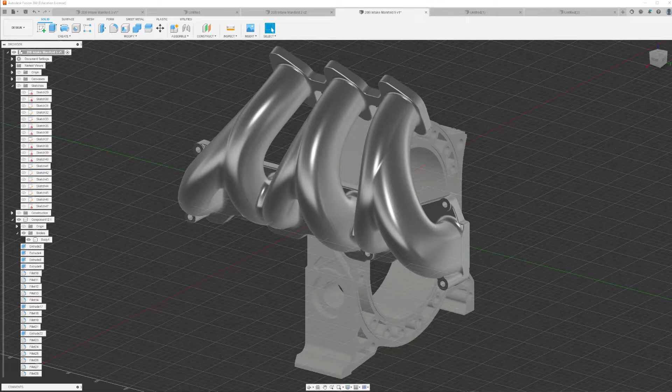Okay, I just wanted to make a video about Fusion 360 and specifically lofting. I learnt a few things in making this model that I didn't know before, and maybe it will help some of you. So we're going to create a new sketch, just make some random shapes.

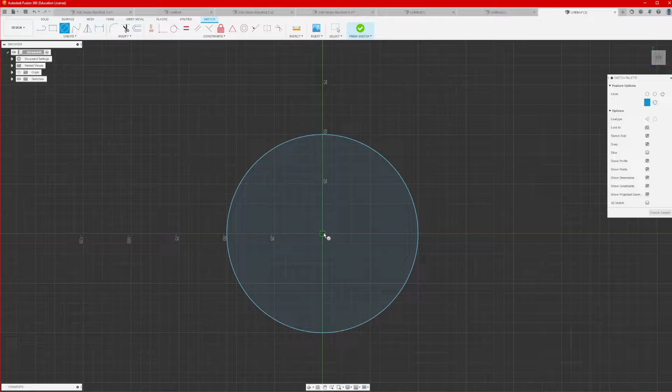I'm going to make a new sketch on this plane, and I'm going to make a center diameter circle, 100mm diameter, 80mm inside diameter.

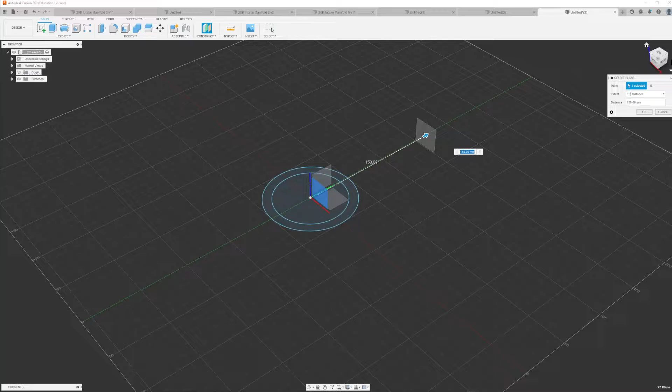Then we're going to finish the sketch and I'm going to make an offset plane. So I'm going to select here, just drag it out however far you want to go. I've dragged it out 150mm from the center.

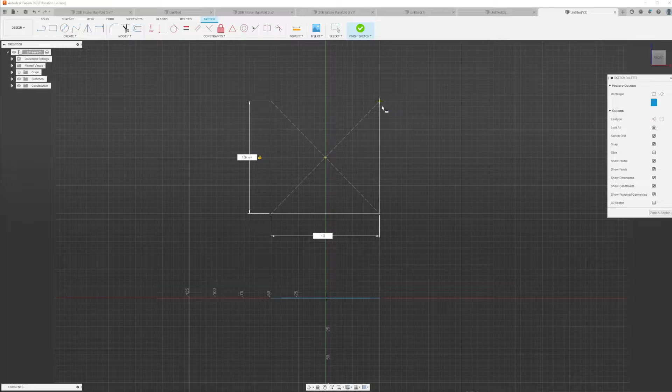I'm going to create a new sketch on that plane, and then we can come up with a 2-point rectangle, a center rectangle. We could do 100 by 100, and then offset that by, let's say, 20mm. Doesn't have to be the same as the first one. So finish the sketch.

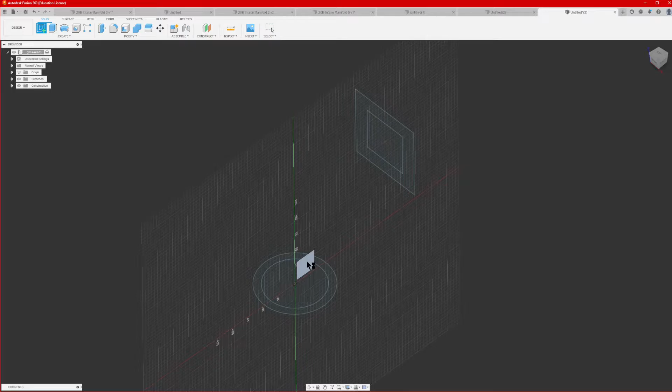One more sketch. I'm going to make a fit point spline from the center points of each of these rectangles and the circle. You'll notice that the spline is just straight right now.

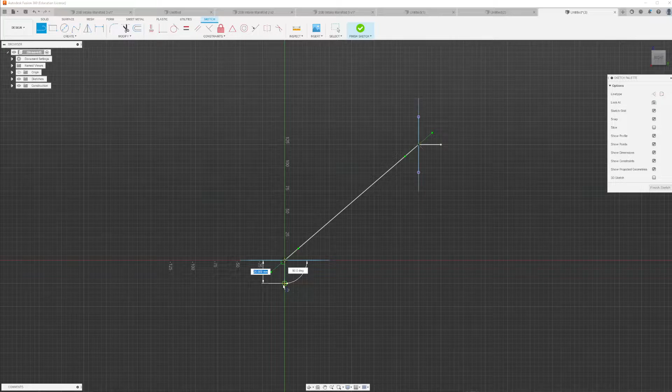So we're going to just make a line to go out. Going to repeat the line to do the same thing down here. Now we can use the tangent tool.

We can select the line so you can see what we're doing, and we're going to make a tangent to this one. We'll do that again, just to this one, so it's a smooth transition between these two places.

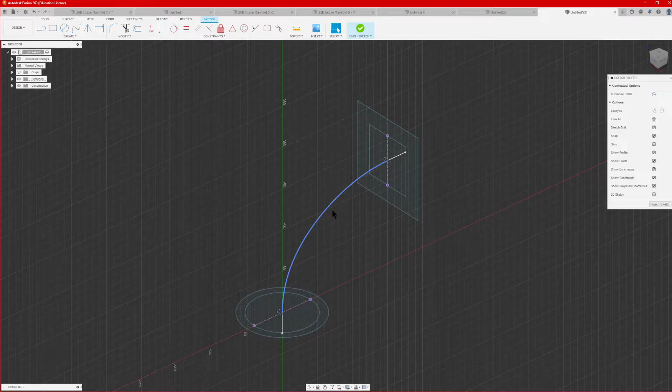Now I'm going to select OK and left click on this spline, then right click and select Insert Spline Fit Point, so you can insert it pretty much anywhere that you want. You might want to make a weird shape to get around some obstruction or something like that.

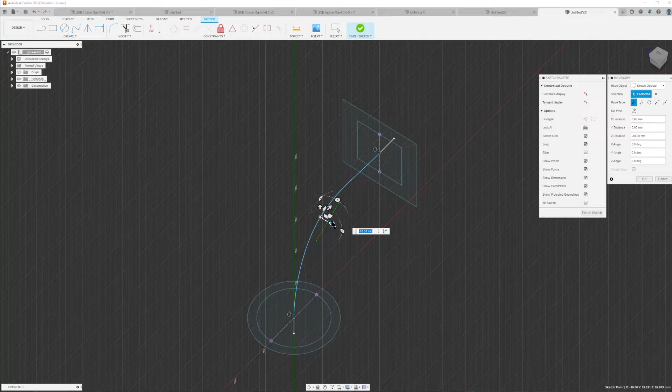So now that we have this, I'm going to right click and select OK, so I can select that spline fit point, and then when it's selected I can hit M on my keyboard to bring up the move command and just move it. I won't go too far, otherwise the transition will buckle a little bit and it might give an error. So I'm just going to move it 10mm.

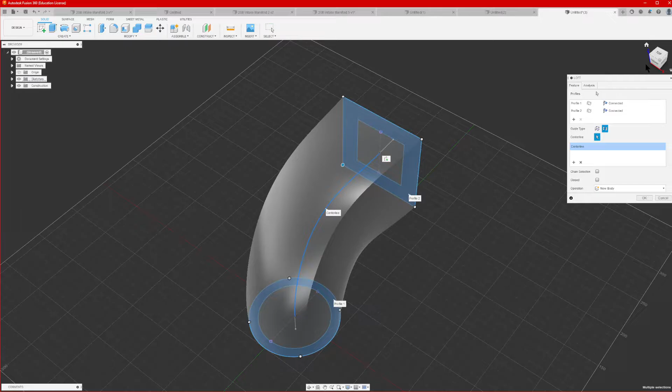Okay, so now we can finish this sketch. We can create a loft between these two profiles, and for the guide type we're going to want to hit center line, so we can trace along this path. You can see that it transitions from the circle to the square.

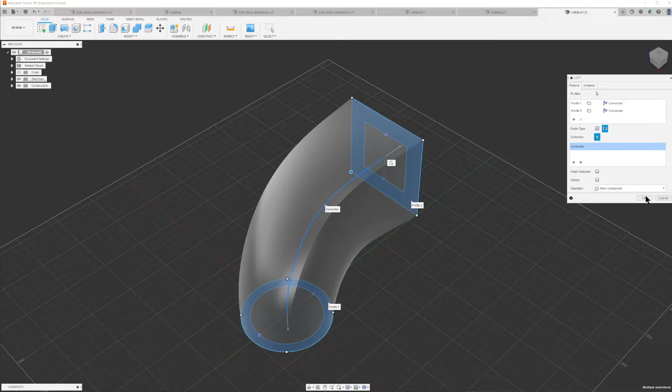You'll also notice that it's a solid, it's not actually carving out the center or anything like that. So the way I found, we'll make this a new component. Even if you hit closed, I'm not really sure what the purpose of selecting closed is, but it doesn't seem to do anything. So we're just gonna leave it at that, and then we have this shape.

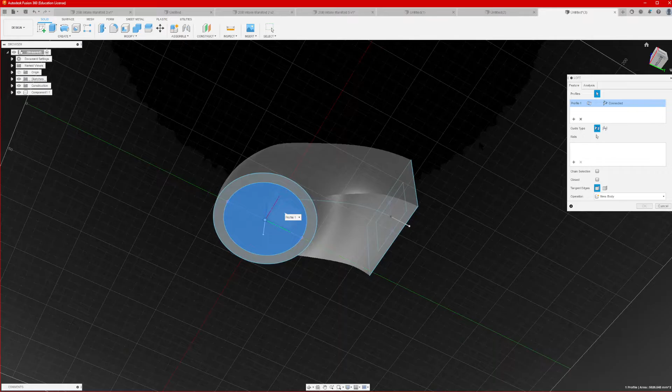But I really want this to be like a manifold, right? I want to have a hollow section with an even wall thickness. So we're gonna do that again and select loft between this profile. Make sure you select the inside profiles, so it's actually going to cut.

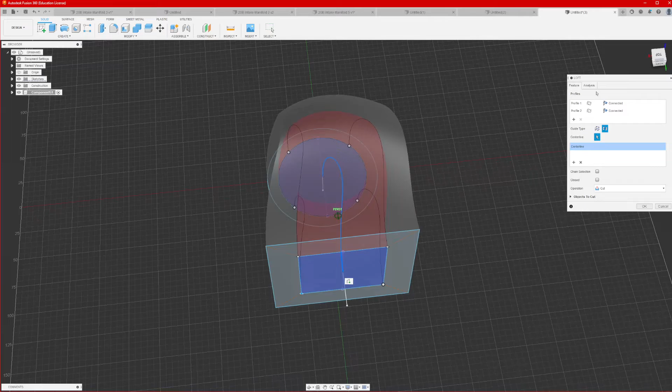Now again, we have to select this spline, so I'm going to hide the model so we can see the spline and select the center line guide type again. Now we can make this object visible and it changes back over to a cut. You can see here that the wall thickness is very uniform, and that looks good, so we're going to click OK.

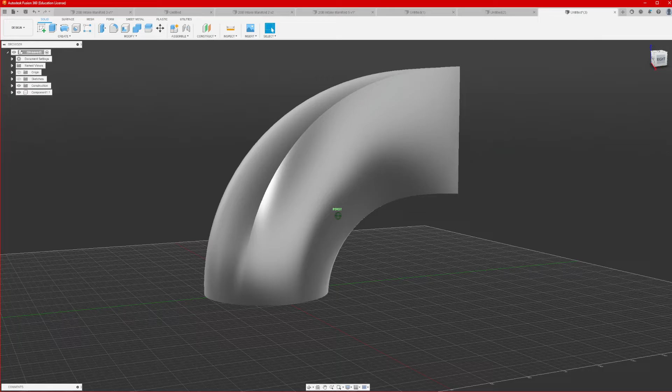And so there you have it, a way that you can maybe double check the wall thickness. I haven't really found a good way to do this, but you could use section analysis. Right here you can rotate that and bring it down and just make sure that there's no strange features going on.

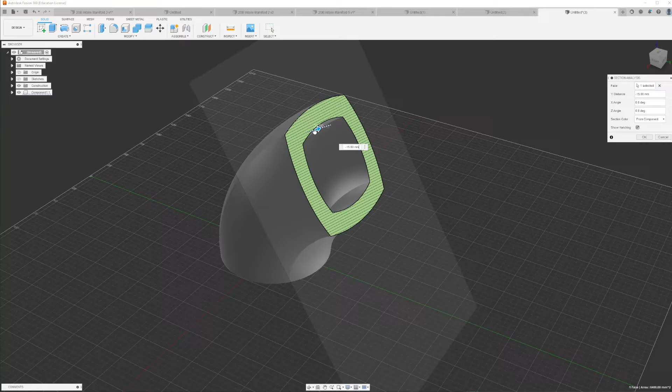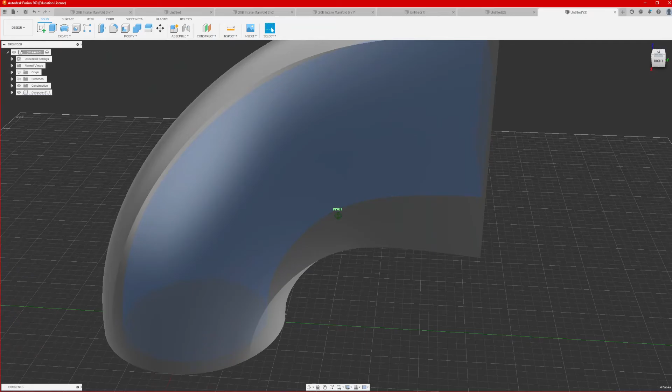So another way that you could do it, this is kind of a bit weird, but you can left click, hold down shift to select the inside walls. That way you can kind of see through the part a little bit and get a rough idea of what's going on inside the part, because you might not necessarily be able to see through the part and stuff like that.

And the third way would just be to change the opacity down to like say 40%, and that way you can kind of see through the part.